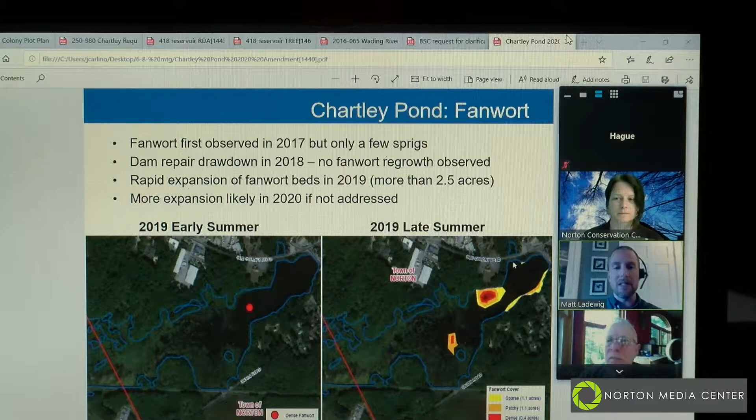Knowing this plant the way we do, and we have this in Lake Winnecunnet as well as Norton Reservoir, we know that if it's not addressed, more expansion is likely for 2020.

The actions we've taken under the existing order of conditions at Chartley Pond have included water chestnut treatment in 2017 with imazamox Clearcast, which was already approved under that order of conditions. In 2018, as I mentioned, we didn't do a treatment due to the drawdown for dam repair. Then last year, in 2019, we did switch to hand harvesting because of the reduced levels of water chestnut, so we didn't have to do a chemical treatment for water chestnut.

We did start treating for variable leaf milfoil, which was originally approved under the order of conditions, but was not picked up as a treatment action by the town until 2019. Then the fanwort continued to expand, so obviously we need a new tool to address that. You can see in the bottom right-hand corner, it's a big plant, takes up a lot of space, produces a lot of biomass, so it can have a very big impact on the pond.

So what we are requesting is to add a few new chemicals into the toolbox we have for Chartley Pond. There are two specific ones that would address the fanwort infestation: one is flumioxazin, and the other is fluridone, also known as Sonar, which is the trade name. Both of these are already included in the Norton Reservoir order of conditions, and we've used them there successfully. We're just asking to add those into the order of conditions for Chartley Pond so we can address the fanwort issue here.

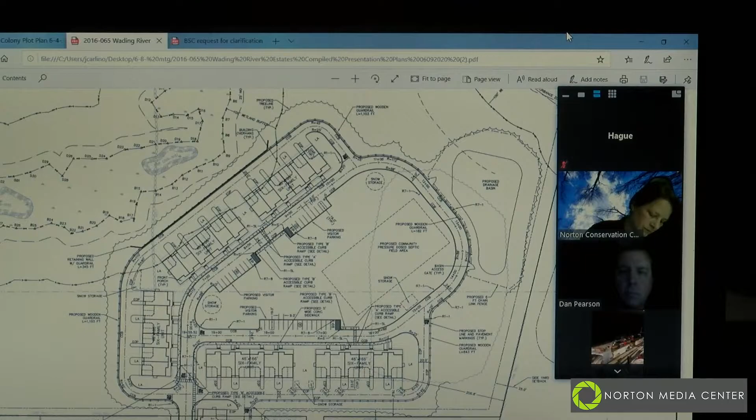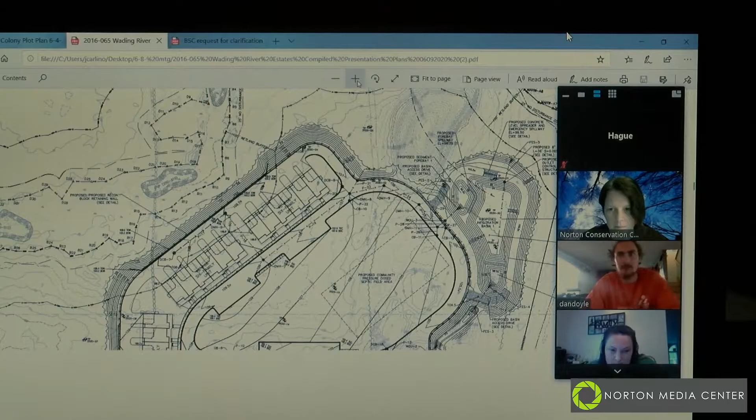We see a grading plan of this as opposed to the layout? Yep, go down to Jennifer, and it'll be the same view of the grading. There you go. Jennifer, can you zoom in a little? How's that? There we go. Yep, so that's the basin.

Previously, all stormwater was caught in deep sump hooded catch basins that went to water quality units into the basins that we had before. What we've done as part of this revision is we've added sediment forebays as additional pretreatment, and we have a section on the easterly side of the site that we are doing a low-impact grass swale for pretreatment before it even gets to the sediment forebay.

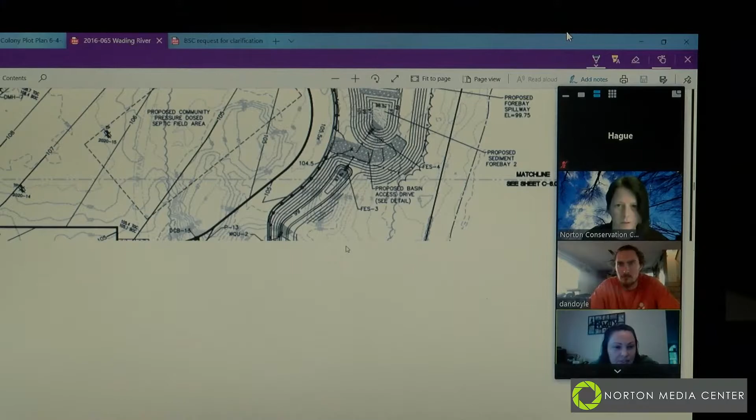It's kind of the end of the swale there, you can see. If you go to the page previous, Jennifer, that might show the swale better, because it starts closer to South Worcester Street. There you go. Sorry, it's not responding very quickly. I know, it's a long file.

You can sort of see the two six-family units to the bottom left of the screen. In that area, with those two six-families, water is flowing off. There's no curb in that area. There's a pea gravel diaphragm for pretreatment, and then it's going into a vegetated grass channel with check dams for additional treatment before it gets to the sediment forebay and basin. So we've incorporated a little bit of LID into this revised submission.

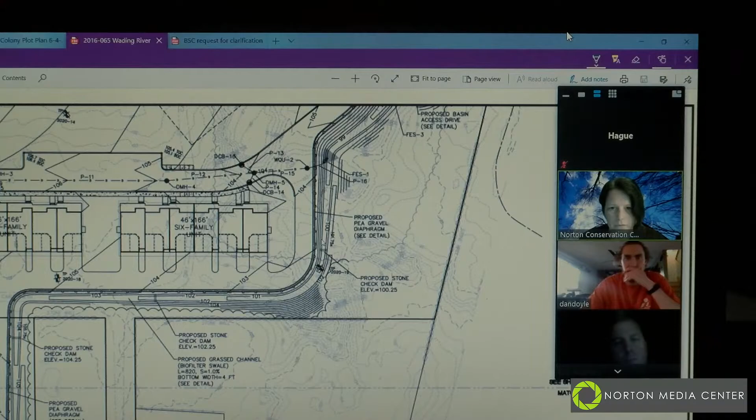All right, I'm going to go back down to this page. So, I know you gave a revised notice of intent. I actually left that in the office because I thought I don't need another notice of intent, but... No, the only difference was there was no riverfront disturbance before, and now we had to quantify it for the basin.

And so page 3 has been revised with the quantification? Yeah, okay, yes. And did you include economic alternatives analysis now that you're in the riverfront area? We did an alternatives analysis. It's one of the appendices in the revised NOI. Okay, do you want to just briefly touch on that?

In the riverfront area, the commission may allow 5,000 square feet or up to 10% of the riverfront area. So not necessarily a given. It does have language in there that the commission may allow it. And they've made some very good attempts to stay out of all resource areas. So it's certainly something we can look at, but maybe you can touch on the economic alternatives analysis.

Sure. Well, the first, or the other alternative we have, is that this was a previously approved conventional subdivision, which had substantially more disturbance to the buffer zones and riverfront area. Yeah, we scaled this back quite a lot.

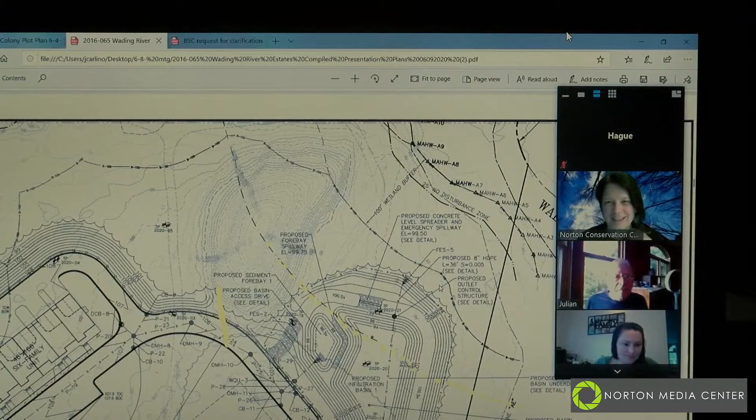So we do have a test pit in the area that Lisa is looking at, but I can't remember exactly what that data was. Tracy, can you remember what that data was? I'll pull that up. 2020-05. Yeah, oh back there, that one was not, because that was where we had our basin previously. Let me just go to the test pit plan. I'll do that here and let you know.

So that was just my point, to know that once you realize you can't avoid riverfront, what did you do to minimize impacts? It sounds like you couldn't relocate that basin completely outside of the riverfront, or you did as much as you could, taking into account the test pit data. Correct, yeah, we did about 24 test pits that were witnessed by John Shrestia, poking around trying to find the most suitable spot on the site. That also leaves a suitable site for the septic area and provides the adequate separation between the septic and the drainage that's required.

2020-05, we had silt loam, and that's why we moved the basin from where it was before. All right, any further questions from other members of the commission, or Lisa, do you have additional questions?

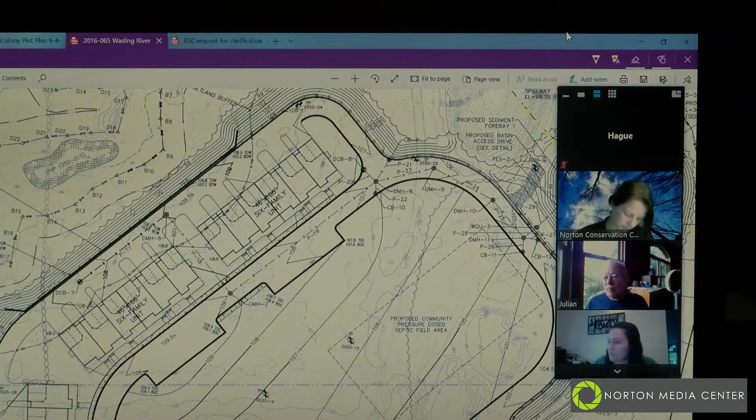Jennifer, we might just want to put something in there as part of the O&M plan that prohibits any application of pesticides, or anything like fertilizers that may wash into the vernal pool. Yep. Well, I can remember it. Okay, okay.

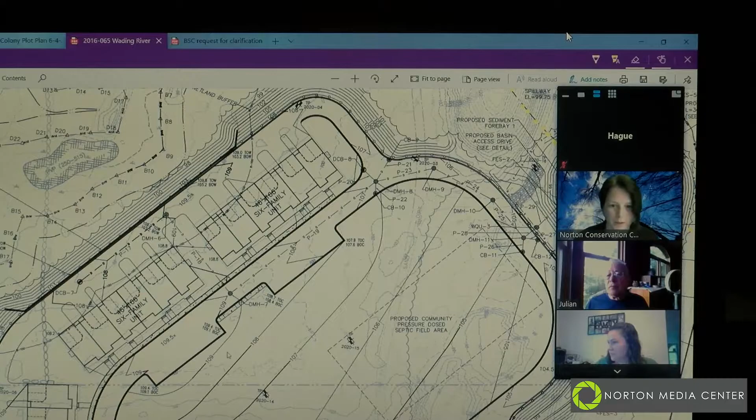All right, any other questions from members of the commission? Yes, I'm getting there. Okay, go ahead.

So your existing conditions plan marks a pretty large area of turtle nesting habitat. A portion of it will now be the infiltration basin. I'm wondering if this area can stay open and managed, and signed as a turtle nesting habitat, just so the management company doesn't go in and put grass all over it.

Yeah, we can do that, and it's funny you bring that up. Tracy and I were talking about that on another project in another town that we did a basin just like this, and our client is taking pictures of the snapping turtles in our pond laying eggs. So it works.

Okay, the landscaping plan that you have—I'm not going to skip to the page, but the landscaping plan has a lot of arborvitae. There is a lot of deer here, and the arborvitae is just going to be eaten in the first year. So you may want to consider a different plant than the arborvitae.

And I'm wondering if there are spots where instead of regular grass or Kentucky bluegrass, you can use a native grass like a blue stem. Those are options. Any more of the native trees and shrubs in your landscaping plan, if you could take a look at that. Okay, do you have a list of native plantings that you would prefer?

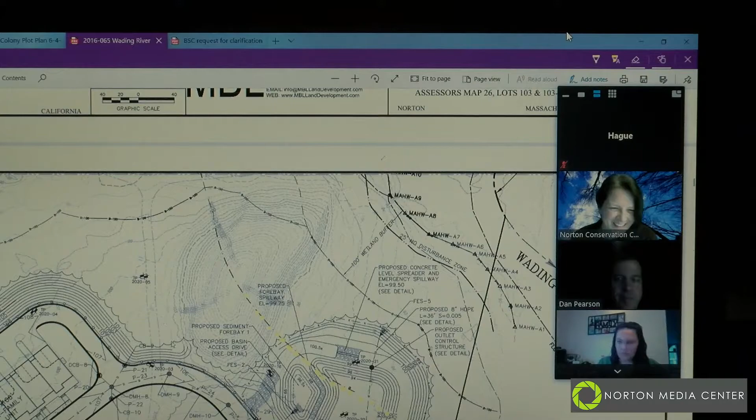Let's see if there's an easier way to do it. So how are they supposed to drive in to access and maintain the basin along here? Is this an opening? Because we have the fence, we have an opening in the guardrail and a gate in the fence. Maybe this is a spot where a little section could be left open so people can access it this way, and just reroute the trail. That's not a problem, if you offset the gate by the length of a car, or offset it into the entrance a little bit instead of right at the edge of the road.

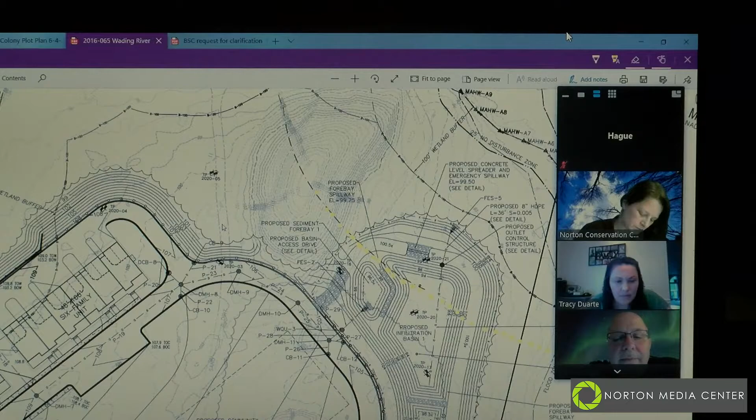I have a question when everybody is all set. Does anybody have anything else to add? I have a bunch of questions.

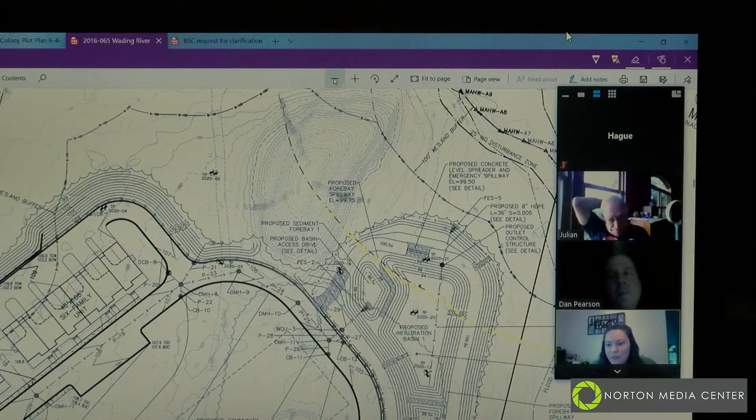I know this one's been hanging around for a while, but did we talk about snow storage and snow plowing areas? We did, it's on the layout plans, which Jennifer would be like 9 and 10 in the PDF. We had multiple locations that are outside of the resource areas and the buffer zones.

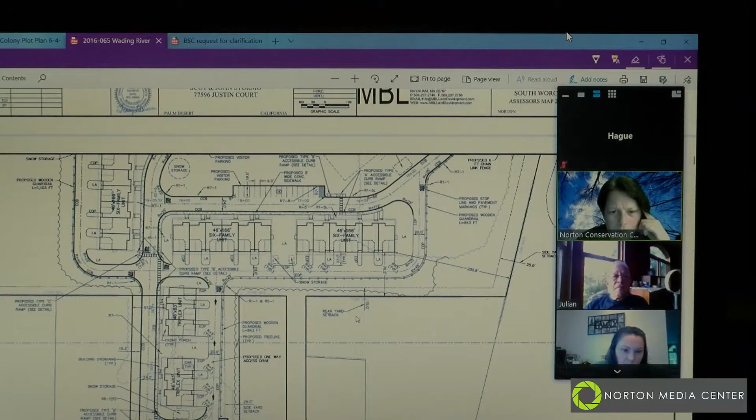Okay, so here's one. Well, maybe we should do it as we're driving in. So you drive in here, not seeing one until we get here. I'm going to go down to the next sheet because I think you have more there. So then we continue driving - that's the first spot. To the north, looks like another spot here. And then one on the other side of the septic system, so if they're coming from those 2-6 families, the truck can just go straight across.

And then there's one here, but I think on the landscaping plan you have a bunch of trees here too. So they have some areas designated. I hope we didn't just lose Lisa again.

Alright, it looks like we did lose Lisa. I think we lost her, yeah. Dan, did you have a question in the meantime, Dan Pearson?

Just quickly, would it help to have signage either on the plan or at the site regarding the turtle area, or is that overkill? Yeah, we just mentioned that, so we're going to condition it. Right. Okay, I'm sorry, I missed it.

And I can attest to how much deer love arborvitae trees - they decimated some of my neighbors' trees. They really do enjoy it. We'll have to get those deer-resistant kind. Right.

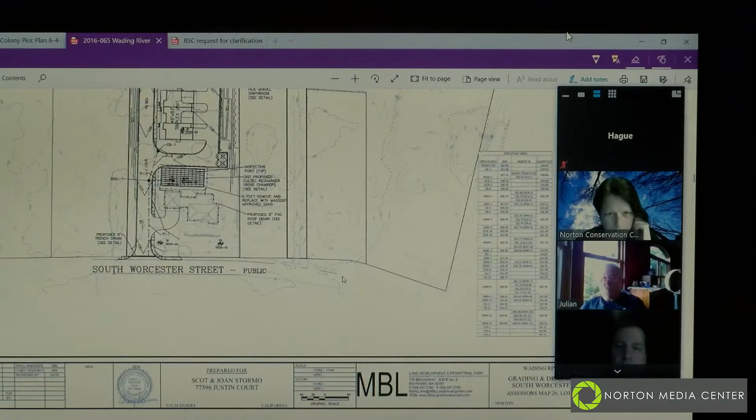So go on ahead with the access to the swale - how are you going to get to the swale? I think I have to go back to the grading plan for that. Yeah, you do. And then when we're talking about the swale, did you include some O&M measures to maintain that swale in the O&M plan? Yes, we've added it to the O&M map and the O&M write-up in the drainage report.

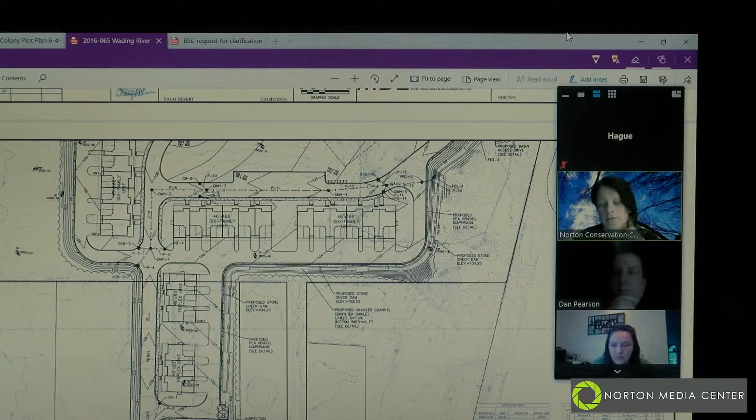Okay, and has John reviewed the SWPPP, Jennifer? John has the new packet of information, he gave us an estimate for the follow-up review. I don't think we've received the check yet, but we haven't been in the office - we'll be in tomorrow to see if it's been received. Brian, or Tracy, do you know if it was sent? As far as I know, it was supposed to have been sent from Scott. Okay, so he'll be reviewing that as well? Correct, yep. Okay, so access to that swale?

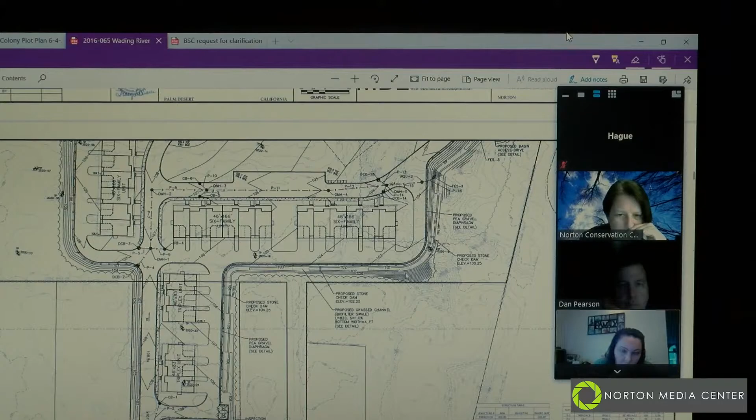Access to the swale can be accessed by the basin access by the forebay. I think you have the chain link fence around there. Is there a gate? Yeah, if you get in the gate, you're in the basin access. So there's one of the gates, right? Yeah, I think they're going to have to add a gate at the bottom - not at the bottom, but they've got to get around to the swale. So by the dumpster, maybe at the start of the swale, we can push the guardrail back where it starts and give them an opening there.

Okay, and then the last thing I had was - so you weren't previously in the riverfront, now you are. Did the fee go up, Jennifer? Doesn't the fee go up, right? Well, the fee would go up, yeah. I don't know that we identified that yet. Okay.

Okay, that's all I had. All right, I have a question about why you need a chain link fence around that detention basin or retention basin.

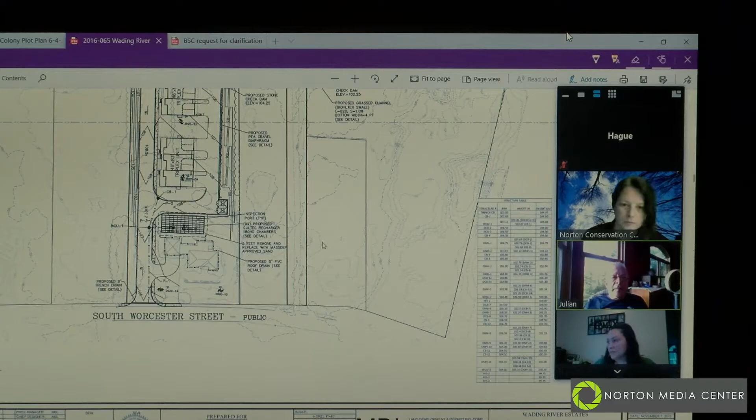It's something that's requested by commissions or boards for safety. They don't want children getting in it.

Or this basin isn't really shallow. But this is going to be privately owned, correct? Yes. But also you have an adjacent river, so. Yeah.

It's not a detention basin, so I think. And there's guardrail along that road the whole way, right? There's no way for somebody to fall off the road into the basin or anything, right? No, the guardrail is to protect.

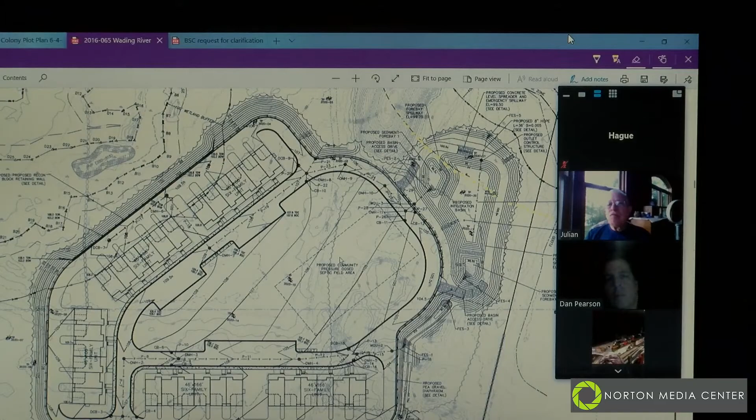Yeah, and that's really the purpose of the certificate, Dan, is to go out and make sure the N-Grid project left the parcel in pre-construction condition. So say someday we went out there and said, oh, you have this pile of fill there, and the landowner says, oh, that was the N-Grid project, they left it there. Then you get into the finger pointing thing. But that's why we have to make sure the site is left the way they found it, basically.

But no, I understand why an attorney doesn't like to see this in perpetuity on something that is not assigned to them. They don't own it. So I think the comment is relevant. I get why it's relevant.

So I think we lost Jennifer. No, I'm still here. Oh, you're still here, I'm trying to close something else out. Anyway, so how do we reassure you? Do we give you a letter saying that obviously after the issuing of the certificate of compliance, parts of the project on private property is not in perpetuity?

Yeah, I think it would be specifically referencing special condition number 61, which is very clear that these conditions are in effect in perpetuity and continue after the issuance of a certificate of compliance, and that it's the landowner's responsibility to adhere to the listed conditions. I think that's the concerning language.